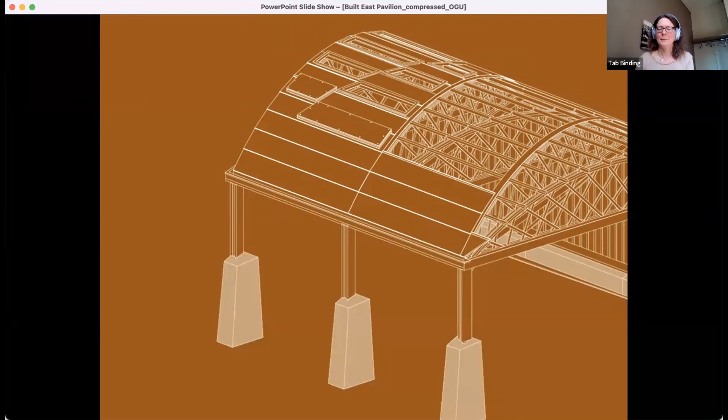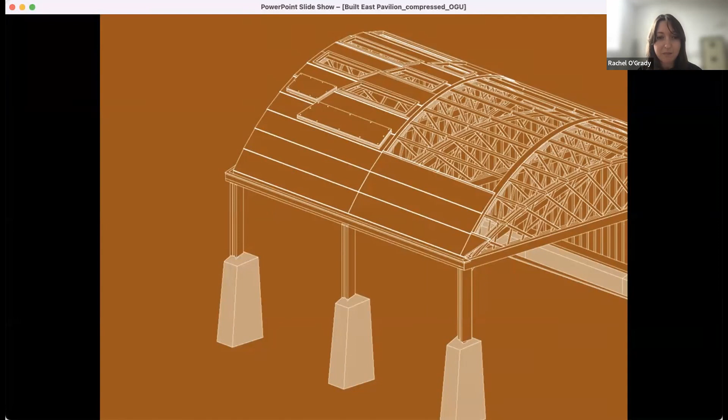This is a really special project for us. It was the first thing we built in Northern Ireland after moving here as a practice, and it was a collaboration with Donna McCrory Architects as well. We were delighted that because of all the hard work from a number of people, it won a Wood Award last year. We were ecstatic about that. So I'm going to whiz through this presentation to try and stick to 15 to 20 minutes.

What is the Built East Pavilion? It's a freestanding structure in East Belfast, and it's still standing. It was built in the summer of 2019. It was also an exhibition that popped up and popped down a few times, talking about the way it was made and the people involved, which is a really important part of the story. It was also a research project funded by Queen's University Belfast and Central St Martin's, so we were encouraged to really look into the processes of manufacturing behind this project and document them extremely well, which was a huge privilege.

The pavilion is made of three prefabricated elements: the concrete feet that weigh it down without going into the ground, which David and Paul will speak more about; the Accoya timber frame with one side cladded with Accoya as well, including the Belfast trusses; and then the Corten steel roof with some polycarbonate roof lights.

Each element was designed to reference in some way the industrial past of East Belfast, and each was made in a different Northern Irish factory by a Northern Irish manufacturer. So the whole thing was a celebration of past and present manufacturing in Northern Ireland. Because this was the first Royal Society of Ulster Architects pavilion constructed here, that felt like the right theme to start with. There have been pavilions since, but we wanted the first one to be a celebration of manufacturing in Northern Ireland.

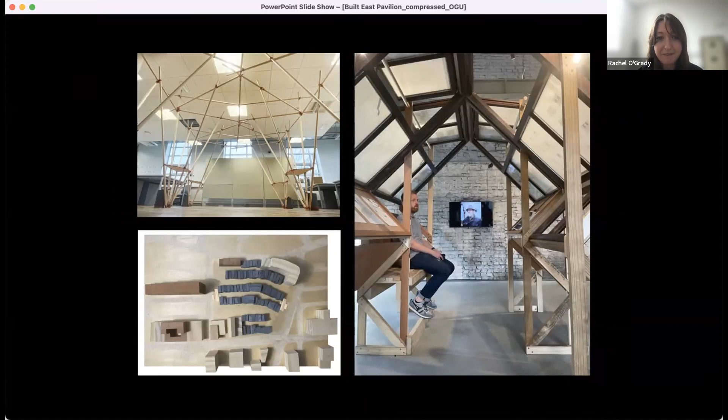Very quickly as well, since we did this project, I've run a studio about demountable and temporary architecture at Queen's University Belfast with my colleague Fergal Murray. And over to the right, we've just put up an installation in the Estonian Biennale about reusing timber and timber components - you can see Chris in there. So it's had a huge impact on us as a practice.

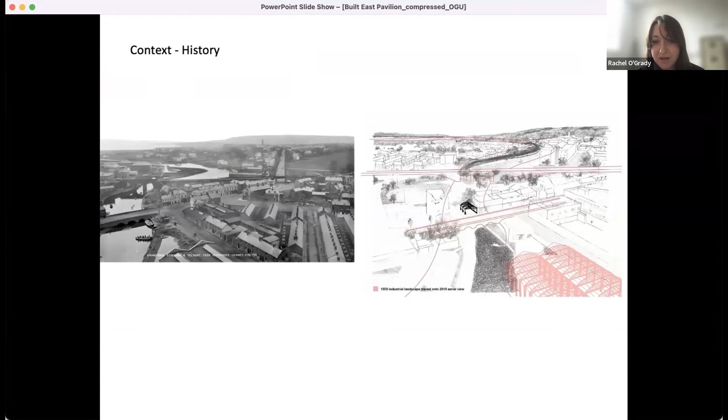These curved timber lattice structures used to be commonplace in Belfast factories, and there were a lot of factories in this area of East Belfast. It has a place in living local memory because so many people worked under these roofs, especially in East Belfast. Here's a photo looking over the site historically, and then a sketch we did showing the ghost of the rope works, now gone, opposite the pavilion and the difference in size.

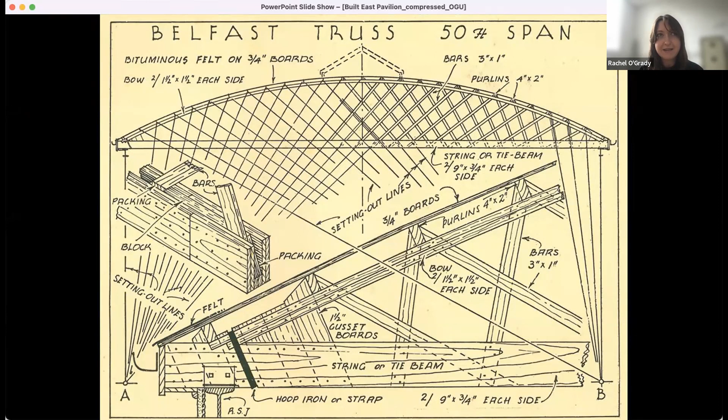David and Paul are going to talk more about the Belfast Truss, but we were lucky enough to be able to refer to historical drawings and the way these things were made. The wonderful thing about them is that they use lots and lots of short sections of timber to achieve very long spans. They're very economical and able to reuse timber cut-offs from the shipbuilding industry. So we really liked that economy with material and the idea of reuse and innovation.

Not so long ago, the Newtownards Road was a very bustling and lively high street, but as with many places, there was this sense of post-industrial loss in the area. A lot of people remember the bustle of when the factories were there and people walking up and down, and they wanted to talk about it. So we wanted to make a pavilion that started those conversations and allowed people to talk about that in a different way.

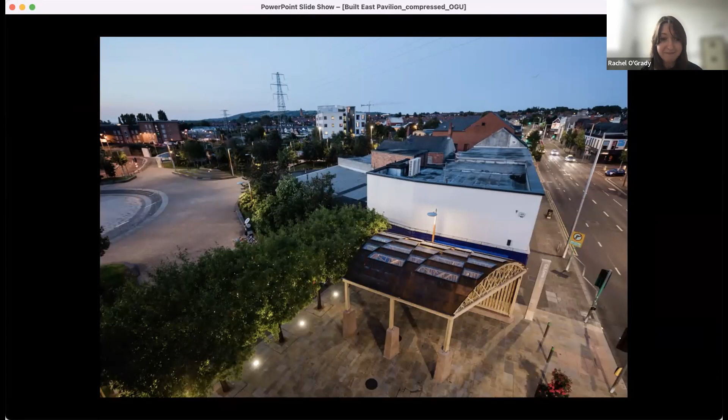The client, Eastside Partnership, is an organisation involved in a lot of regeneration in East Belfast, and they've done a great job with many sites there, helping to achieve C.S. Lewis Square, which is the hard landscape park that forms the immediate context of the pavilion. If you look at the development of the site, it was only completed very recently, and it's this big bowl shape that's great for cycling and scooting. But that part of the park felt really finished and newly done, and we didn't feel it really needed a pavilion there.

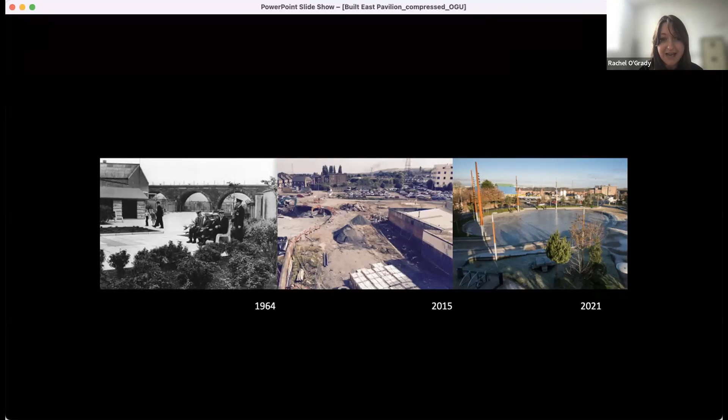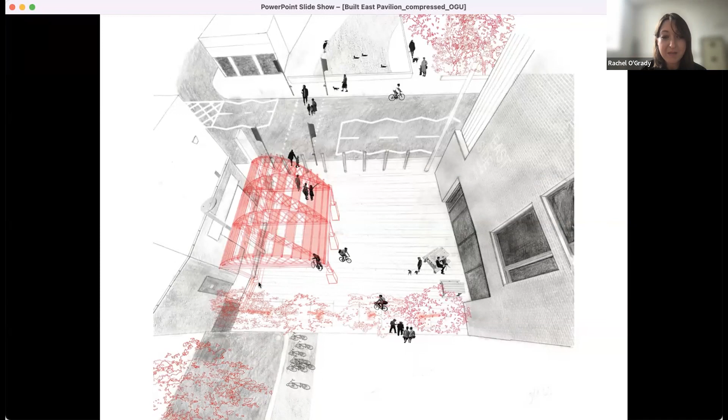It would add clutter if anything. So the location we picked for the pavilion was actually in this small plaza between the main park and the main road. It receives people straight off the pelican crossing, so people come off and slip under it into the main park. Hundreds, thousands of people have passed under this thing by now. We placed it there on purpose so that as many people as possible would pass under it. There's someone passing under it on a scooter.

What this means, of course, is that it's an incredibly public structure, and it had to be able to take an enormous amount of wear and tear. It was also the first pavilion like this to be constructed in Northern Ireland, so there was a lot of worry from funders and others about vandalism and how it would be treated. There was this desire for a really high level of robustness for something that the brief actually said would be a 6-month pavilion and then come down.

So there's this kind of meeting of brief and reality where, even if it's there for 6 months, we need to make it incredibly robust. But at the same time, we need to think about the fact that it may come down and need to be moved. It also needed to be assembled very rapidly on site because it's such a public place, and we think it makes a nice edge to this plaza as you go into the park.

So anyway, the robustness - we chose Accoya, and Accoya is brilliant. I think the last presentation was an Accoya project as well, but we chose Accoya because it doesn't require a lot of treatments in order to be robust. It has a 50-year warranty from Accoya itself if it's above ground. It won't rot. We did add a UV protective coating because we were told it may bleach a bit in the sun, but we just added a clear coating and it's been absolutely fine.

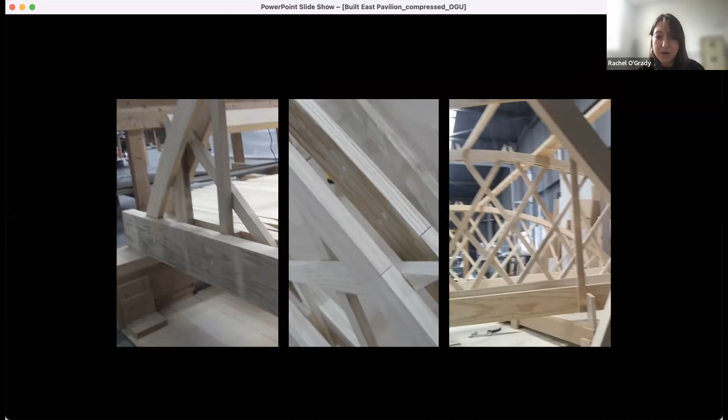So just some photos here where you can see the excellent job that PBJ did hiding all of the fixings, pelleting them where they were needed, but most of them are hidden on the inside because the truss is sandwiched - you could hide an enormous amount on the inside of that sandwich. So you can hardly see the pelleted fixings either there. On the right, there's half of a truss being made, and you can see it being fixed on the inside, the lattice bars being fixed on the inside.

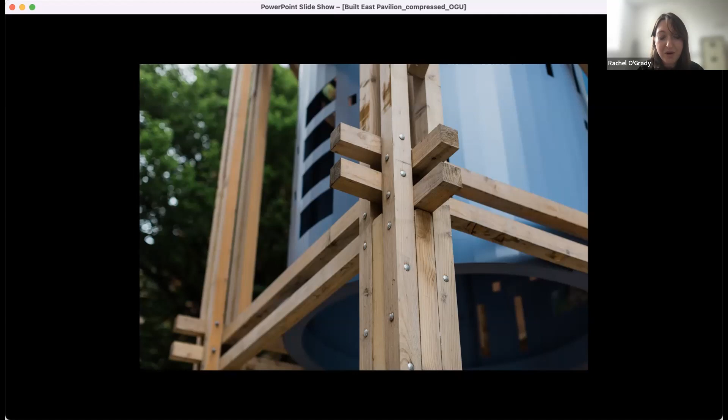Just for comparison, this is the Adelaide Street project again, which is proudly wearing its bolts and showing how it's going to come apart. That's a later development, I think, in the way we're thinking now that we know the level of respect that structures tend to receive in Belfast - people haven't covered them in graffiti or anything like that. So we have a different approach. But as I said, for the Built East project, that wouldn't have been so appropriate.

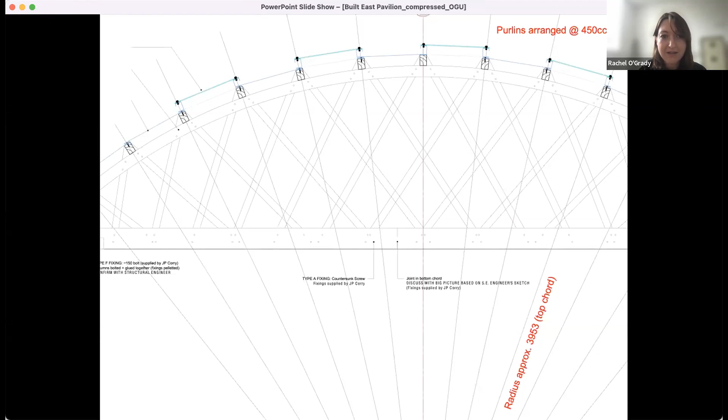And just to prove there are fixings in it, here's a little diagram showing the fixings at top and bottom. We took that from the historical drawings, actually showing how the thing was fixed, but I'm sure David and Paul will talk more about that. And then quickly, just some photos showing that yes, it did need to be robust, but not because it was badly treated, but because it's been well loved and used for lots and lots of different things.

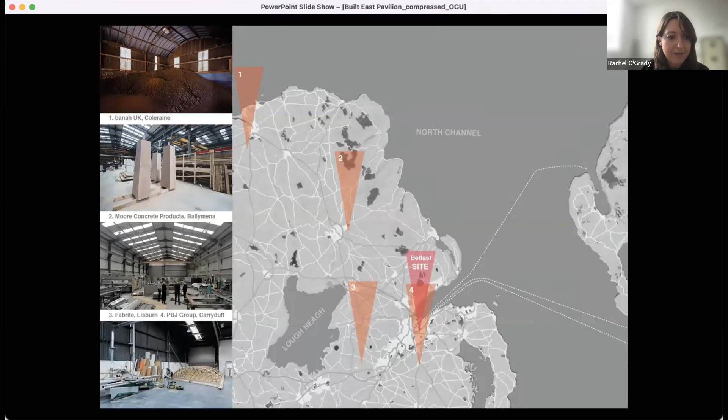Okay, back to the team and the different manufacturers involved. This is just a quick map of banah, Moore, Fabrite, and PBJ and the site.

I'd said already that our way of designing this thing was like a collage, referencing historical parts but bringing them together into a new whole, so it didn't have this strange museum exhibit uncanniness to it, but hopefully it still evoked memories.

We used a lot of physical models at first, which I still think is a great way of starting out with timber design, making scaled models. In some ways we were respectful to history and tried to take lessons from how to set out the bars and different details.

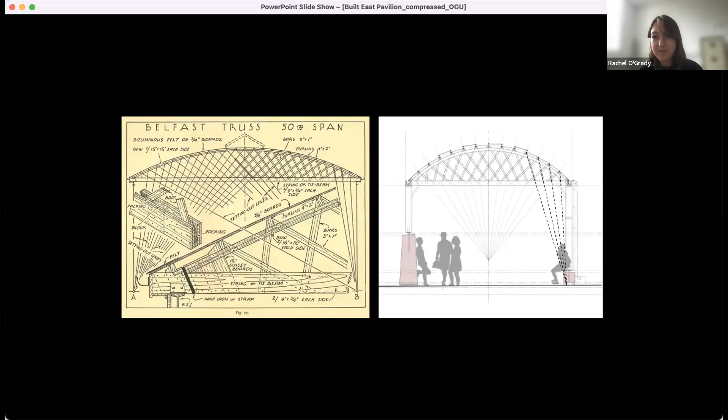One thing you can notice is that our curve is much curvier than the original larger factories, because the span is so much smaller. That did present issues, which we felt was worth it for the way it looked. But it was also so much smaller, and it was a pavilion with a different audience, so it needed to be more finely crafted, able to be touched by members of the public without getting splinters.

On top of that, we wanted to piece together the different elements in a new way to keep it resonant and interesting. So we ended up with this zigzag design of the trusses, which was Donald's idea. I think it's great because you walk around it and there's a dynamic sense - it changes a lot when you move around because of the two angles of the trusses. But what it means is there's two truss types as well.

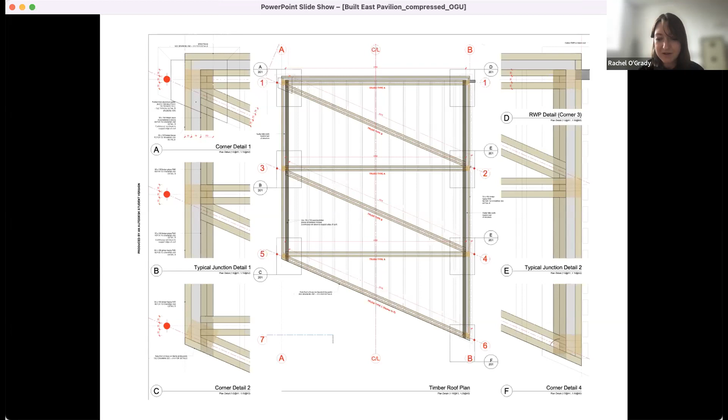So you have two curves, and the purlins run directly over the top, so the geometry had to be perfect. It was crucial that it was perfect - without that, it just wouldn't work, it wouldn't fit together.

We had to work very carefully with the manufacturers to make sure we had these different elements, and figure out how we were going to make them so they reference history enough, but also show off innovative methods of construction.

The project we did with Joe Laverty, the photographer, throughout took portraits of the manufacturers, went to the factories, looked at the process, and I think everybody was on board with what we were trying to do, and it ended up in this exhibition.

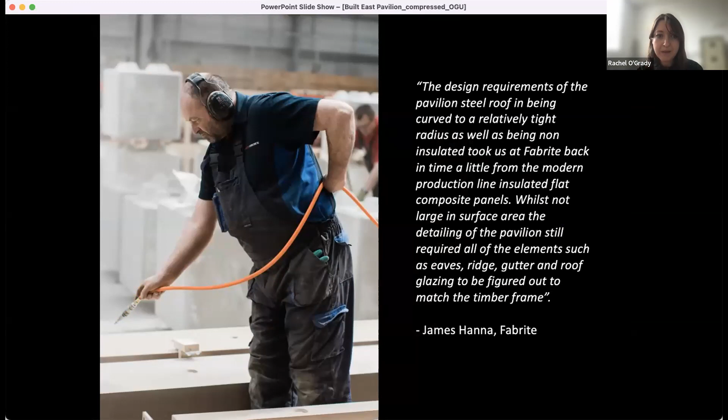This is a quote from Fabrite there, and that was really important to how the thing turned out. For example, here we have the flat seamed corten roof, which ended up referencing the shipbuilding industry - a really clever move from Fabrite.

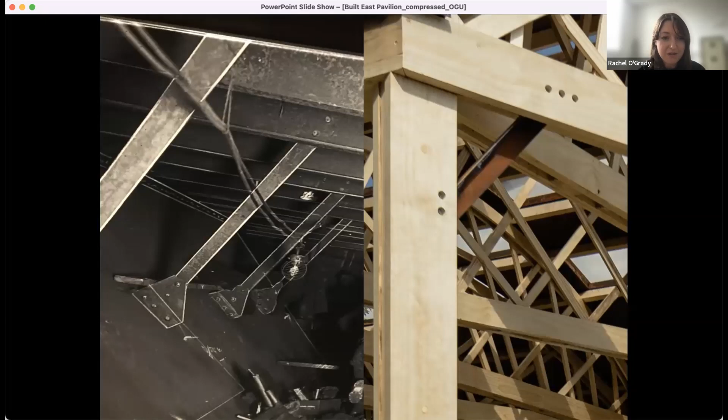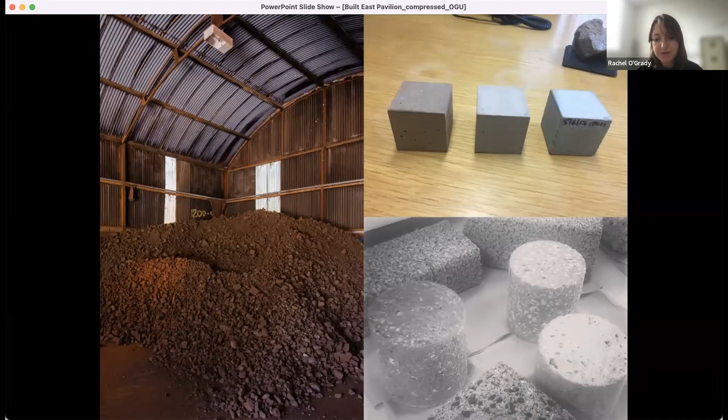These are the brackets that also reference the interior of a ship in the end, the one place where the bolts are expressed. The other way we collaborated with different manufacturers was to make a lot of prototypes one-to-one. Here is the steel, but this I'm talking about timber.

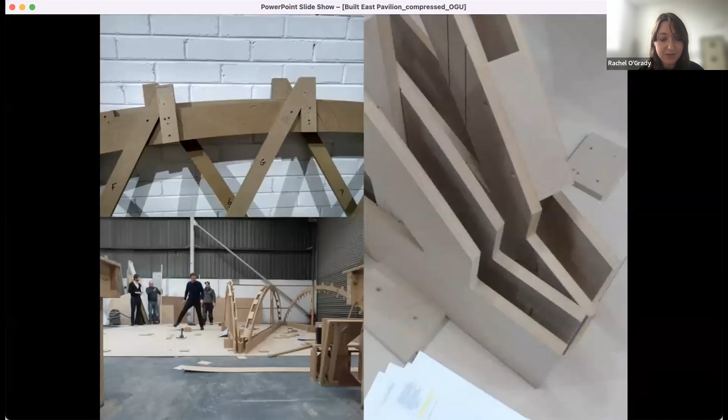When we gave the CAD drawings over to BPJ, they actually CNC'd it all out in MDF at one-to-one, including the floor plan, and set it out. You can see this prototype here, and that was to look at all the tricky joints and think about the sequence of how it would be put together on site as quickly as possible.

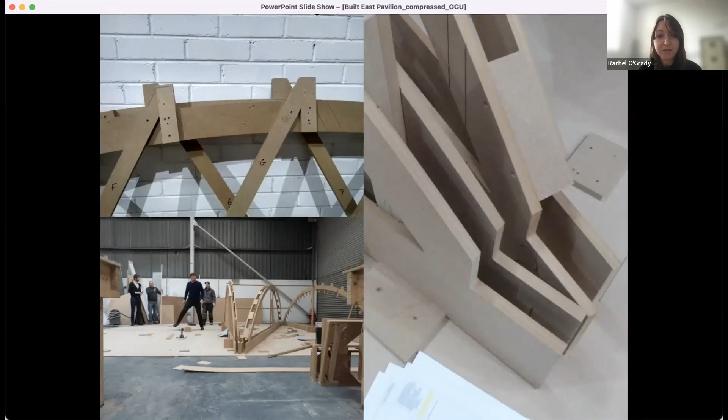So first of all, how are all these connections going to be secreted away, as I described? And secondly, how can it be taken apart and then put together on site really, really quickly? Here's the MDF model there of some of the joints and bits and pieces. And there it is - luckily the purlin coming across and working okay.

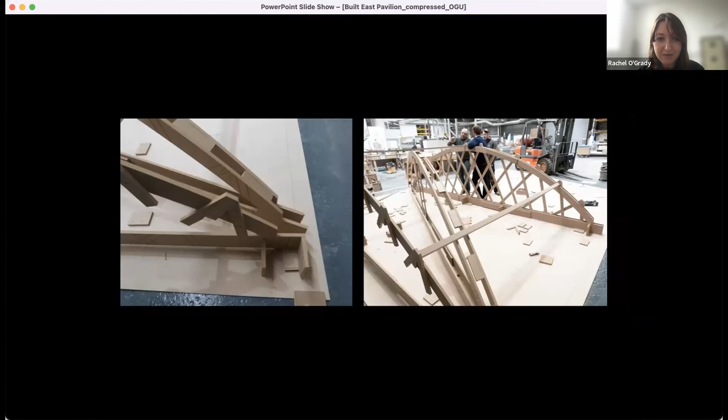One of the things I mentioned earlier was the curve. The radius was such that the idea of bending the Accoya over the top in a bow was not going to work in this case, as they did with the original, which had a much shallower curve in those factories.

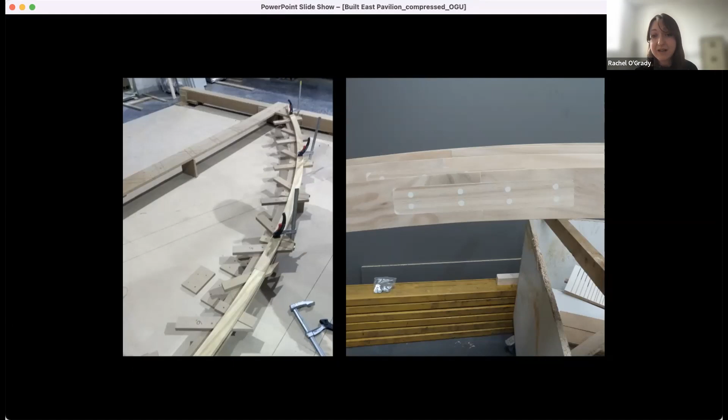So BPJ made the decision to CNC cut those curves. We weren't keen on the idea at first because there's wastage involved, but there's also a wastage of people's time, and the fact that Accoya behaves very differently to other woods - it's strong and was not going to curve in that way. The result is brilliant, and it takes in the innovations we have now that weren't available then. That's just a photo showing how these curved pieces were joined together.

And then the other thing about these factories is, of course, that they're maybe joined together a bit more roughly on site, and there's a bit more room for adjustment and tolerance. With ours, there's no room for tolerance, there's very tight tolerance. And so the angles had to be perfect, especially the purlins came in on site and rested on top of

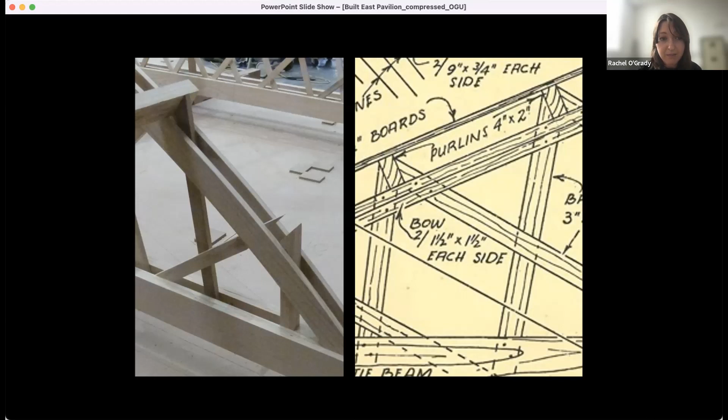these trusses that were made whole as trusses in advance. And so you can see there that the Accoya took that sharp angle really, really well. But also the MDF template allowed these angles to all be cut perfectly in advance, again, for rapid on-site construction. There is the structure made entirely in the factory before going to site, fitting together like a jigsaw puzzle. And here it is on site, and it was on site.

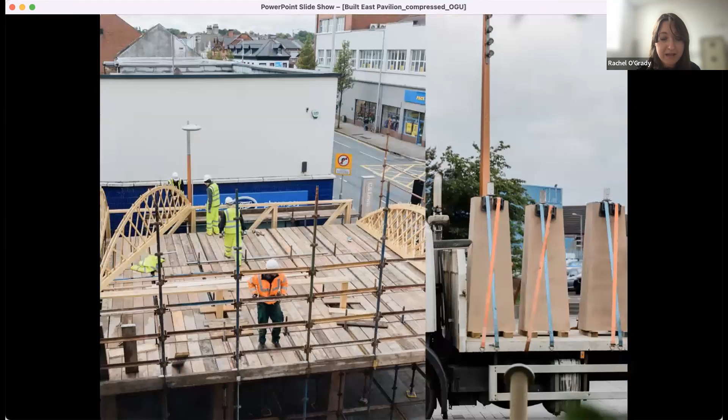This part took about a week, I think. It was 2.5 weeks total on site.

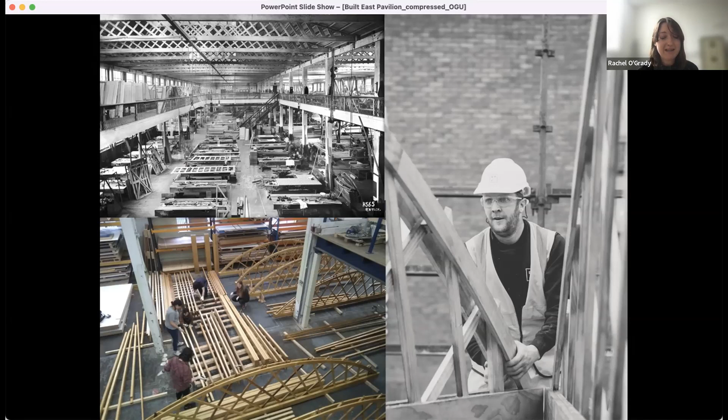timber. And we had this question throughout, like, how are we going to bring together innovation and tradition to make something that maybe feels resonant locally and settles into its place? And very quickly, what we realized is we don't have to worry about that, because when you're working with skilled craftspeople, they bring together in their own mind and in their hands and in their muscle memory tradition and innovation.

They just pick it up and work with it. And so it just came through. It just came through because of them and their hard work, and because they were on board with the project. And so that's Stephen there just putting it together. And I'm going to leave it there.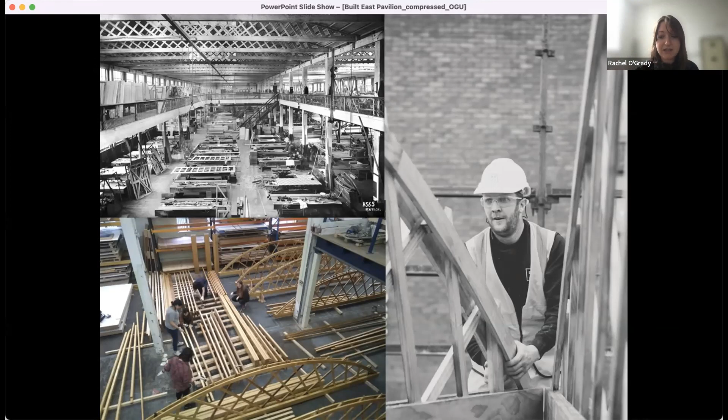Okay, hopefully you can see that. And thank you, Rachel. Paul and I were the structural engineers working on this project, and it was a great project to work on, very interesting. And I'll just take you through sort of the structural analysis and how we worked through that.

So as Rachel has noted, the Belfast Truss was used in factories, hangars and warehouses, not only in Belfast, but across the UK and Ireland and America, and as far afield as South Africa. It came to prominence in the late 19th and early 20th centuries because of the efficiency and economy for covering large clear spans. It has been used to create clear spans of up to 37 meters.

Previous forms of timber trusses became too expensive and cumbersome to construct at these large spans. The Belfast Truss provided a light, easily constructed option that could be built on site using small sections of locally sourced timber. It is now being considered as a possible way to promote sustainable roof construction due to these benefits.

Recent examples have been used, such as the sports hall for the Winston School in Gloucester. The slide here shows, again, Harland and Wolff, but also, it was extensively used for aircraft hangars, and this is an example in Aldergrove. But because of that, it was used across the world for RAF facilities in particular.

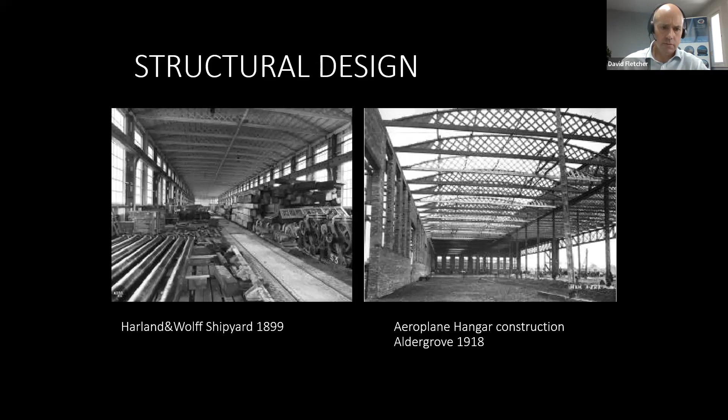Pardon me. We developed our design using the historical examples, such as the image on the left-hand side of this slide. These came from the likes of Andersons and McTear and Company in Belfast. Andersons became very successful with offices across the UK and in New York. I'll let Paul discuss the intricacies of the analysis that we completed, but these historical examples were vital to our understanding of how the design of these trusses was developed.

The roof itself is a barrel shape and was commonly covered with timber sarking and felt. This was supported on purlins, which in turn transferred load to a series of trusses, generally set at 10 feet or 3 meters apart. The trusses comprised a pair of parallel upper chord members, which can be seen on the left-hand side image here. And these are bowed to form the barrel shape.

These were joined near the eaves to a pair of straight lower chord members, again obvious on the left-hand image there. Lattice bracing was placed between the upper and lower chords. The lattice bracing was in the form of two interlocking fans. You can see the springing points of these fans at points A and B on the diagram.

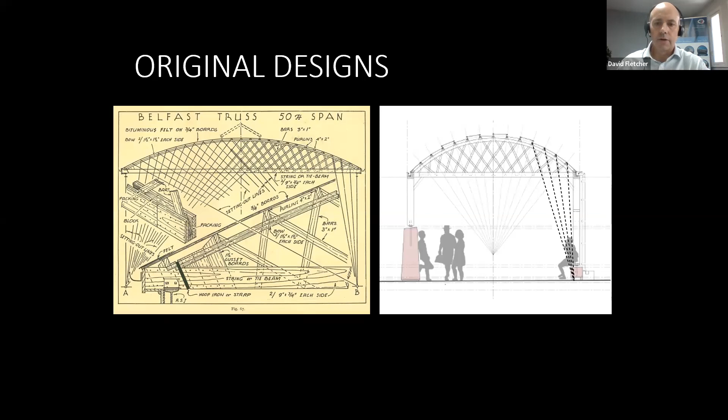These points were generated approximately 1/3 of the span below the eaves. The intention was for the internal ties to meet at 45 degrees to the top chord and 90 degrees to each other. And each met at the top chord to then support and hold the purlins in position. Our purlins on this project were set at 450mm centers to suit the cladding proposals. And I'll hand over to Paul to go through the structural analysis.

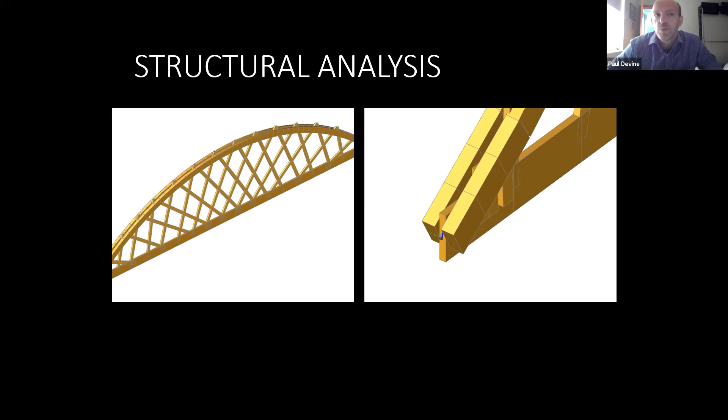Two parallel members created an excess eccentricity in the structure, which caused transfer stress into the lath members, which we didn't want. They were meant to be working as purely axially loaded members, but we were creating a turning, twisting action which we didn't believe would actually be there. So there was a lot of experimentation in modeling to find something that we felt adequately transferred stresses in the way we would expect.

On the next slide, we see the junction of the lath members to the top of the chords. What we did here was pass the members through and join them rigidly at the top, which we thought was appropriate. If you look at the left-hand picture, you'll see the two lath members — these are the same pictures, just one expressed in its physical dimension and one not.

On the right-hand picture, you'll see a small highlighted pink element, shown on the left as a thin member connecting the chord to the lath members — that is the nail. We modelled every single nail in the structure individually, with the correct thickness and stress properties, so we could allow for the ductility of the nail in movement and therefore transfer stresses between all the members.

In this way, we were able to get a more sensible distribution of stress, with the members in the lath diagonals acting in a more axial fashion, as opposed to taking bending stresses, which would have resulted in much thicker members.

Finally, I'd like to talk about the connection of the laths themselves. What we did was first try to model the lath side by side where they would overlap, and that created bending forces because we now had an offset between the members. In the end, we modeled them in plane to each other, allowing them to slip past each other within the element and in the truss, thus allowing the members to act as individual diagonal members, except restrained at the top and bottom.

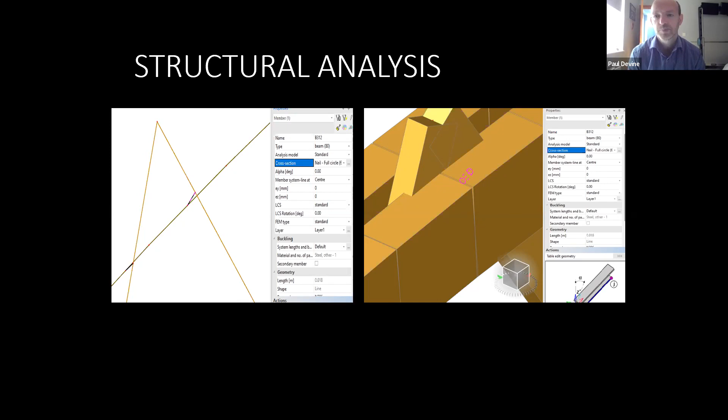Okay, thank you, Paul. Just going on to the other elements of the project. During the very short construction period, as Rachel has said, it was only 2.5 weeks on site, it became apparent that there was an amount of sway in the frame, which is expected, but it was considered that we needed to tighten this up slightly.

We looked back at historical drawings and calculations again, and it is apparent that some examples did have knee braces as such, and these can be seen in the corners between the columns and the bottom chords there. So we worked with Rachel and Chris and the contractors to develop a design of the knee braces, and these were formed in Corten steel, which allowed them to be fitted between the laminate of the column and the chords.

And also to blend in with the covering. So they effectively cut out any sort of sway issues that existed.